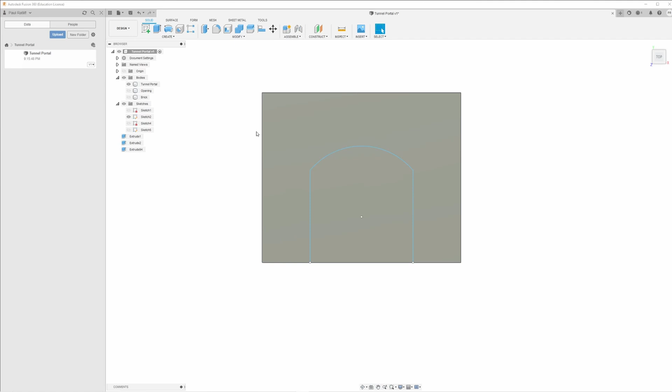First thing we want to do is turn off the brickwork so we don't see it, and turn on our tunnel portal sketch. Now in order to make our framework, we need to come back to where the sketch we need to work with is lit up, the eye is on it so we can see it. We need to right click it and go down to edit sketch and left click.

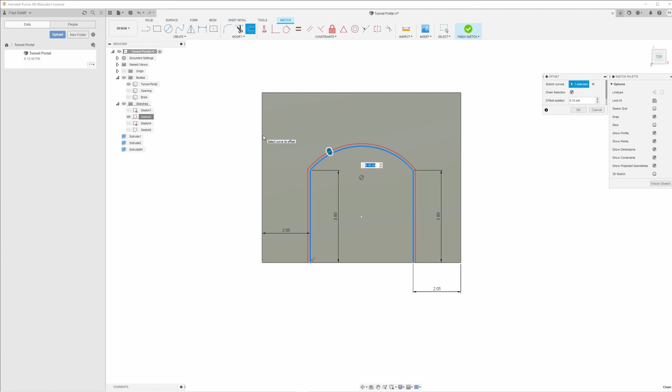Now we can work on these lines, because what we want to do is offset it. So offset, click our tunnel portal opening. I want to make this 5 millimeters, so 0.5, for our tunnel portal opening.

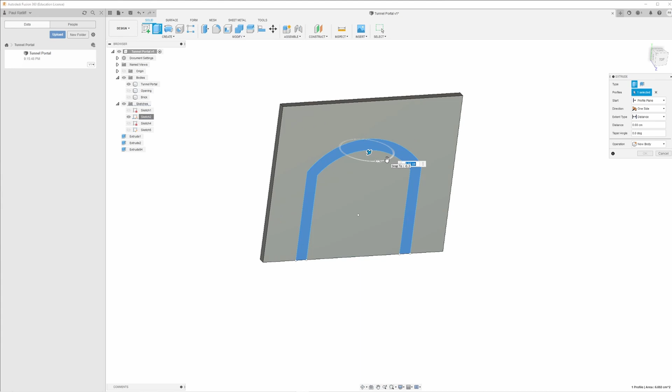Now we want to extrude this opening. So E for extrude, click on just the frame. I want this to be, for right now, 3 millimeters, so 0.3 of a centimeter. And as always, make sure you select a new body.

Now we're going to come up here and name this Portal frame. And we want to hide it.

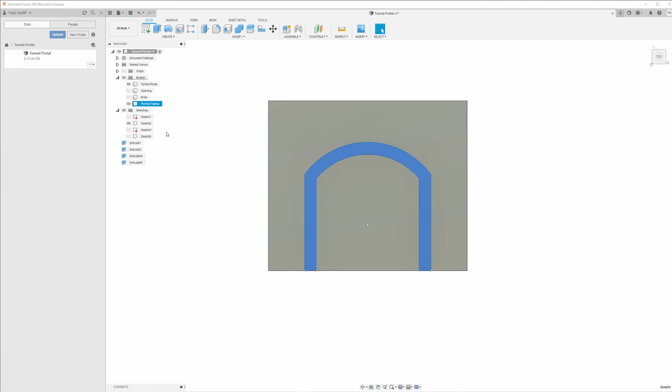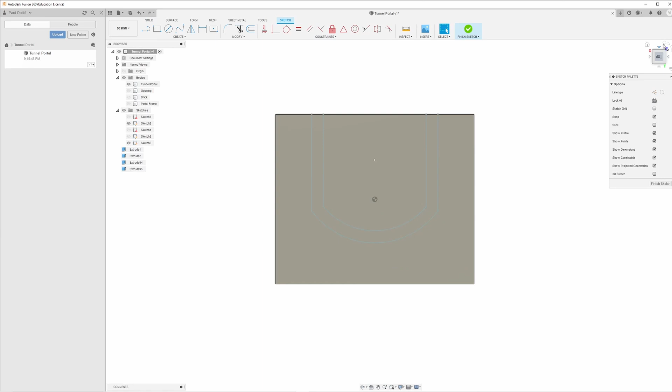Now the next thing I want to do is create a keystone for the center of our arch. So we're going to come back up here to sketch, and you can select, I would not select on the arch itself, but on either one of these. I'm just going to select here, and I don't know why, but it always likes to flip it over on me. Come back up here, and the first thing we need to do is make a center point line that we can work off of.

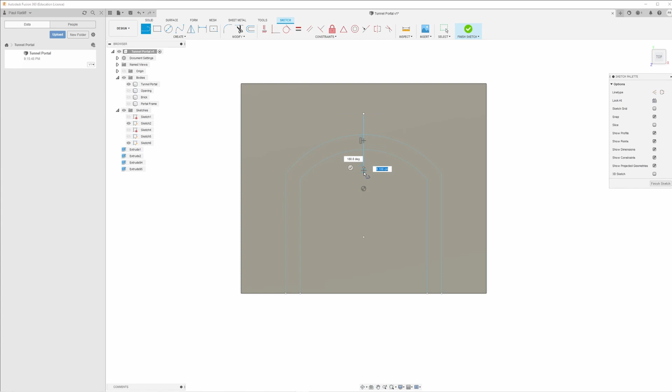So we're going to come up here to line. I like to come back to our origin because we know this is the very center. You can see it kind of drags, a nice straight line up. We'll click above it, back down anywhere in here, doesn't really matter. This is a line we're just going to be working off of. We're not going to actually use it, we'll be deleting it here in a minute.

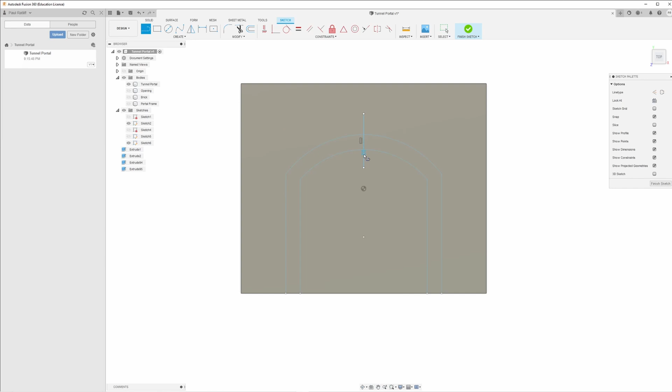Now for my keystone, I want the bottom section to be approximately 6 millimeters wide, so 3 millimeters on either side. We're going to grab a line tool, wherever you might want it, zoom in to see how far down you want it to hang. I'm going to have it hang down just a little bit here. Click on that, go to the right 0.3 of a centimeter. Grab our line tool again, click right here, go to the left 0.3 of a centimeter. That is the bottom portion of our capstone, our center stone, our keystone, I guess is the actual word for it.

Now we need to do the top, and that is going to be 1 centimeter in width total. So let's start up here, again anywhere you want it to be. Go to the right 0.5, so 5 millimeters. You can hit L for line, by the way, you don't have to keep going up here. Go to the left 0.5 centimeters. Now why we did the bottom lines and top lines first is so that when we join it to make our keystone, the angles are going to be exactly the same on both sides. There will be no guesswork this way.

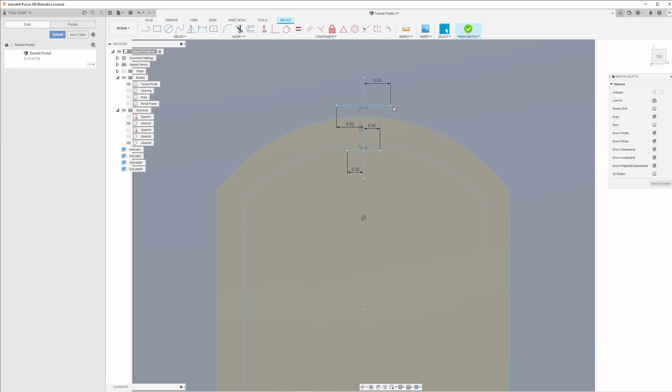So L for line tool again, click that point, drag it down to this point, click it. Now since I did not hit enter, the line tool is still selected, so I can grab this point, come down here to this point, and click.

Okay, now I'm going to hit escape to get rid of that tool. I'm going to click on this line, backspace to delete it.

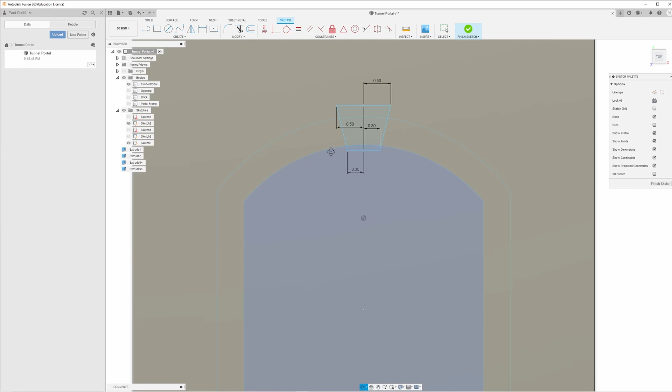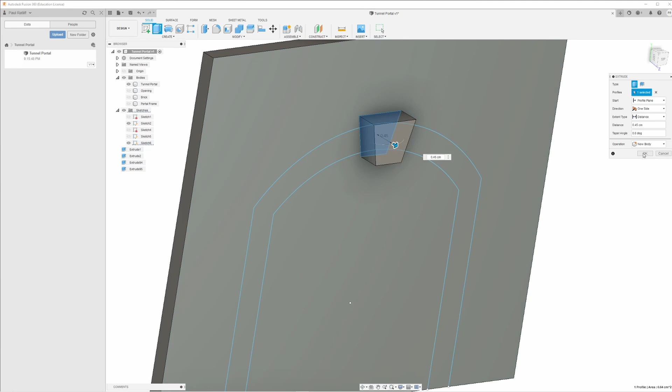Here is our capstone. Now we know that we extruded our frame here 3 millimeters. So I'm going to extrude, E for extrude, our capstone. Let's do it 0.45 of a centimeter. Again, a new body, because we are going to work with this here in a little bit.

These are just getting our basics down, so to speak. Turn off of that. Let's turn the frame back on. And there's what the opening is going to look like once we get the opening. Let me throw the brickwork on here real quick.

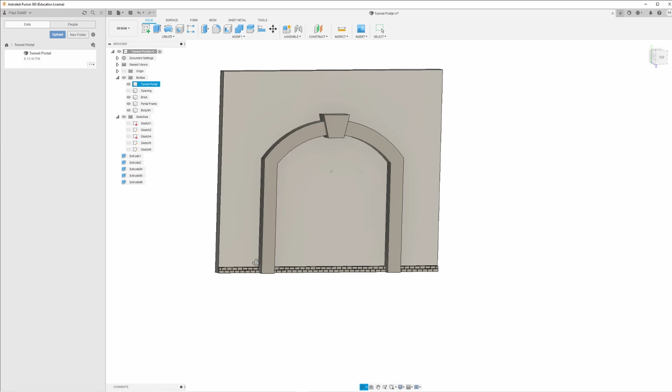And there is the brickwork. As you can see, yes, the brickwork is underneath of this, but it's not going to be printed because it is underneath it. Alright guys. And we can leave all this stuff on if we want to. It's not a big deal.

I am going to actually create the header next. So I'm actually just going to turn all of this off so I don't have to look at it. It doesn't distract me.

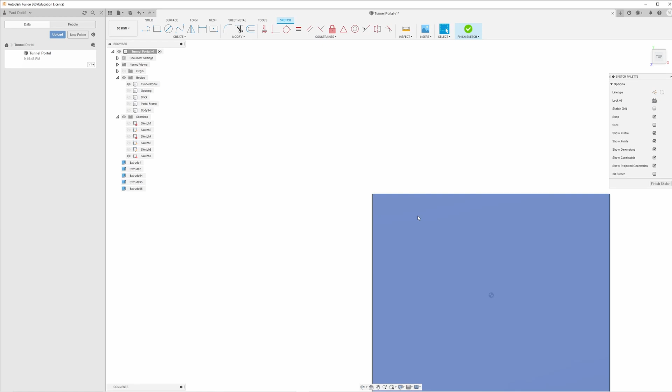Now the header that I want, again, we're going to create a sketch, click on the front of the wall here, grab our 2-point rectangle, and I do believe I called this a 2-point triangle in the last video. I apologize, it is definitely a rectangle.

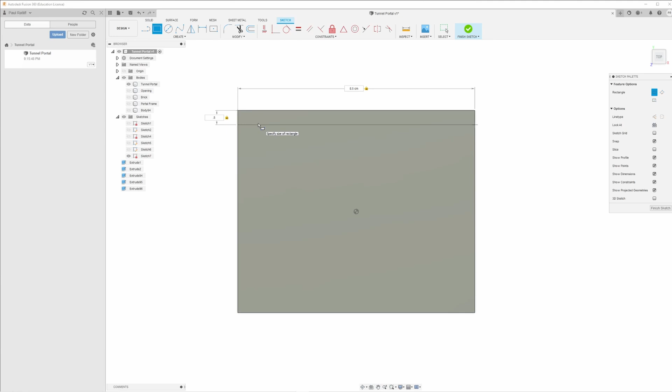We know this is going to be 8.5 centimeters wide, and I want it to be, how deep do I want this to be? Let's make this 5 millimeters down, and let's extrude this out. Let's make this extrusion 6 millimeters, so 0.6.

Again, a new body. There is the top of our header. Now let's make this header a little fancy.

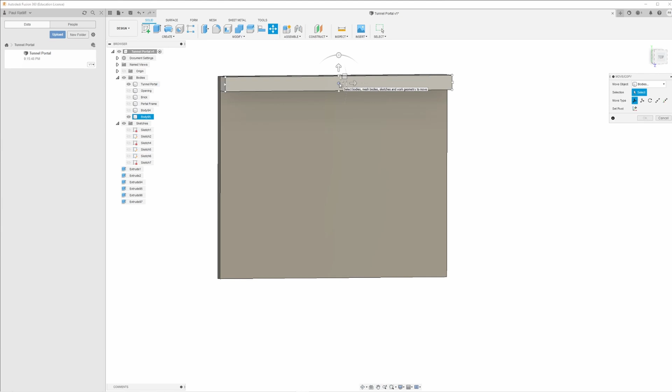What we're going to do, we're going to cheat a little bit here. It's not actually cheating, but we're going to grab this header. We're going to create a copy, and we are going to drag this copy down. I'm going to drag it down a little ways. That way I have access to the inside faces of both of these so we can align them really well. So click OK.

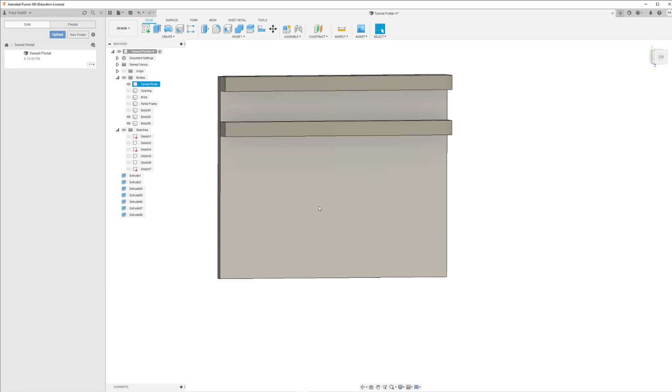Next thing I want to do is I want to align this to this. So we're going to grab our align tool, click on the inside of this object and the inside of that object, and it brings them together.

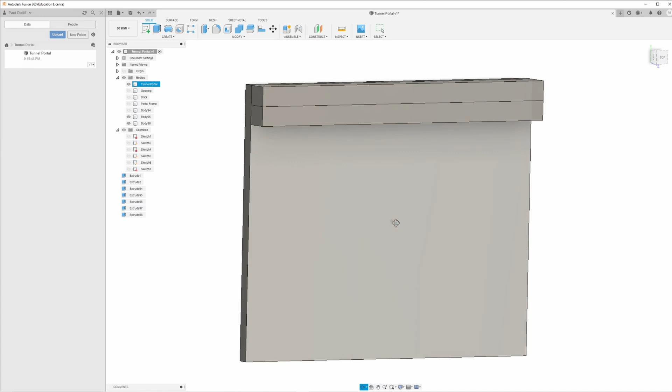Again, I may have mentioned, or I forgot to mention in the last video, I mentioned it in the previous set of videos when we did the shed, but you see me moving things around here. All that is you click and hold down the center scroll button and you use your mouse or trackball to move the object around the screen. And if you want to rotate it, you hold down the center scroll button, the shift key, then you can rotate this in any direction that you want. And as always, if you get lost, come back up here, hit home, and it brings it back to the home base. Alright, enough of that.

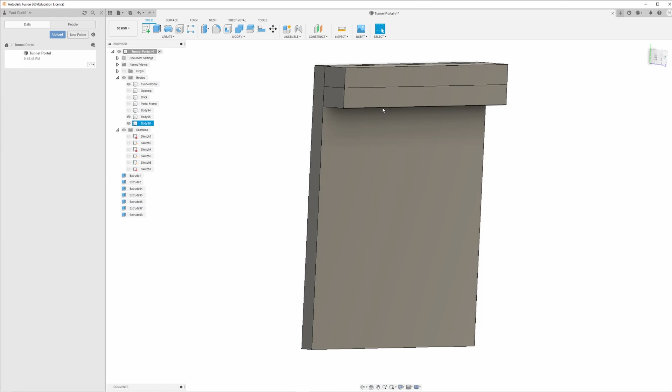This I want to make a little bit shorter than this, so we're just going to extrude it down. So E for extrude, and I only want it to be 3.5 millimeters tall. We have it at 6 millimeters right now, so that is 2.5 millimeters.

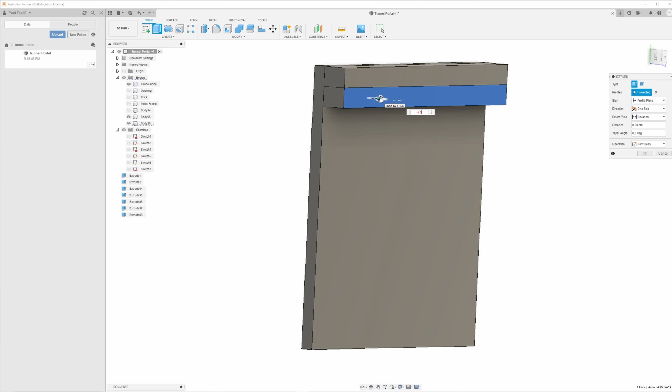So minus 2.5. Whoa, back up. Minus 0.25. That's much better. We're doing a cut.

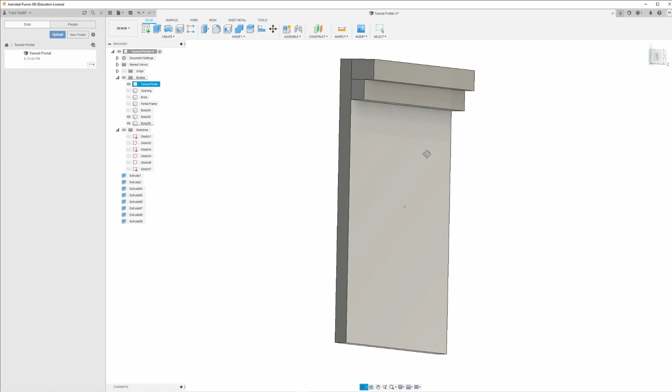Next thing I want to do is we're going to add a little bit of fanciness to this. I'm going to roll this edge. So we come up here to our fillet. But I don't want to do a rolling ball. I want to do a setback. And so click on setback.

Click on this edge here, and I'm going to push it all the way in. Now that's what setback looks like. That's what I like for this.

Now let me go back and cancel this and show you what the rolling ball looks like. Okay, rolling ball is your standard, what pops up every time. And it looks pretty much the same. Boy, I feel like a fool. There are different points on different things I've designed where it does make a difference. Apparently not this time. I don't think so.

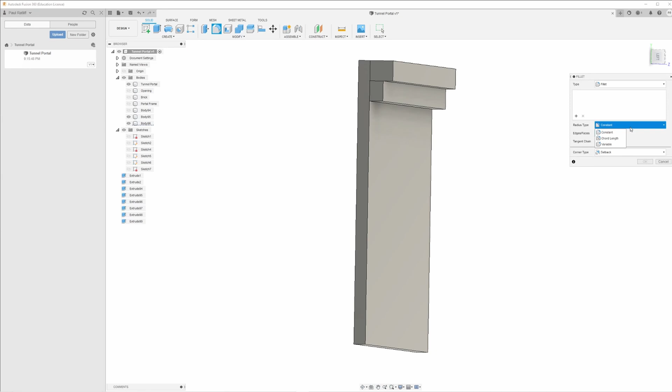Setback. I like setback, it looks slightly different to me. Doesn't it look different to you? We'll go with that.

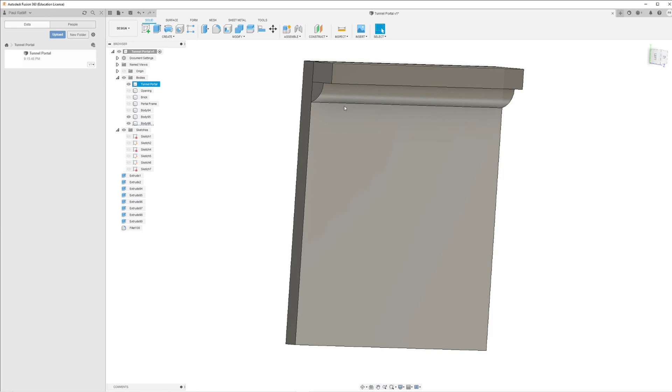Okay, now we're not done just yet. I want to make something a little fancy, I don't know if you call them porticles or what they are, but we're going to make something fancy. We're going to look at it sideways here.

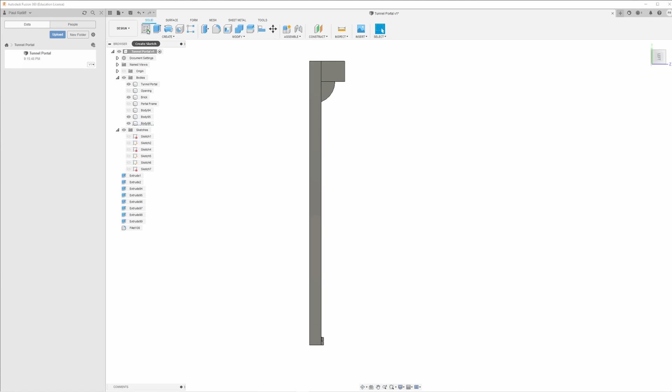Now I'm going to turn my brickwork on just so I can see the depth of it. It's kind of like eyeball what I'm going to do here. We're going to create a new sketch, and I'm just going to create it on this plane.

And what we're going to do here, this is going to be completely and totally up to you what you want to do. I'm just going to use a line tool.

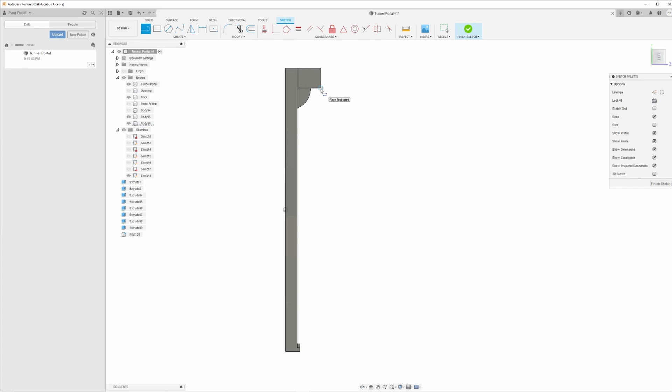I'm going to start on this corner, come out a little ways, click it, come down at an angle, click it, come back out just straight a little bit more, click it, come down at an angle. I didn't want that much of an angle, I clicked too soon.

Let's see here. We're going to come straight down, meet up with this edge, come up here to the corner, and we'll close it.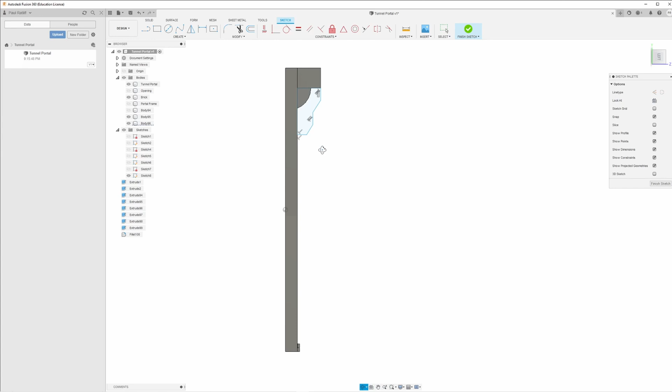And you can see it sits right there in the very center. Now I do want to turn my portal frame on to make sure. Well, see that's too—see, I'm glad I did that, because that's going to interfere with the keystone. That's way too big.

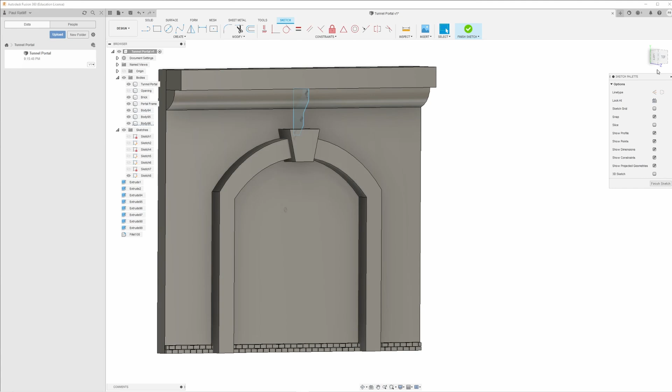I think maybe I'll leave my keystone on as I redesign this. Now it lets me push it in. You see how that worked?

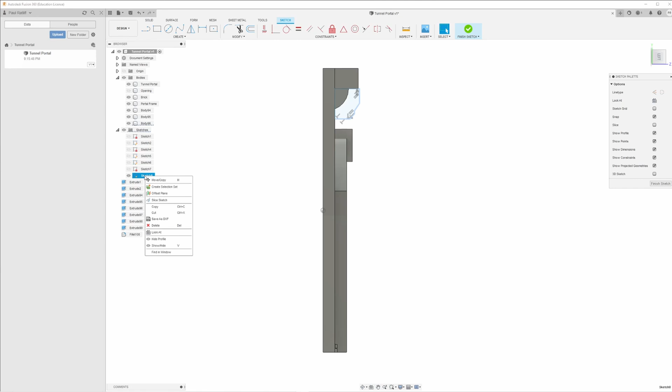Now actually I'm just going to get rid of that, all of it. I'm going to start from scratch. So you can right click there and click delete. So again, let's start from scratch. Sketch—we're going to sketch on this plane.

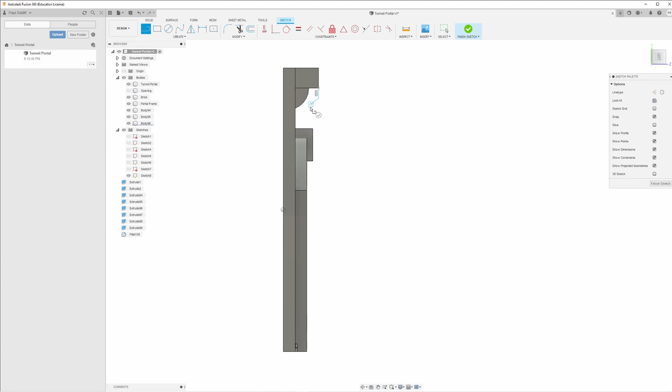We're not going to get quite as crazy this time. Come out a little bit, come down a little bit. What's that going to look like? Well, that might look okay.

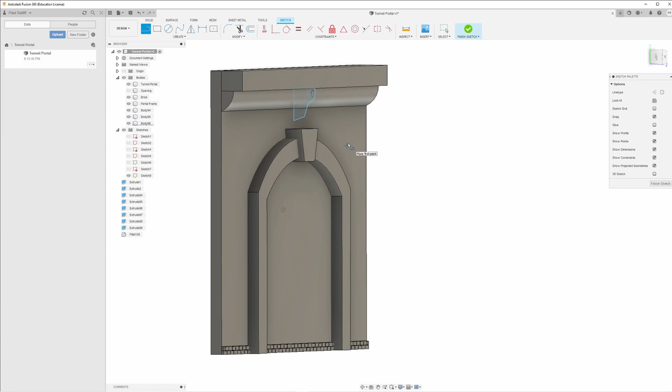Let's extrude it and see. Again, make it a new body. Let's do 2.25 of a centimeter. Click OK.

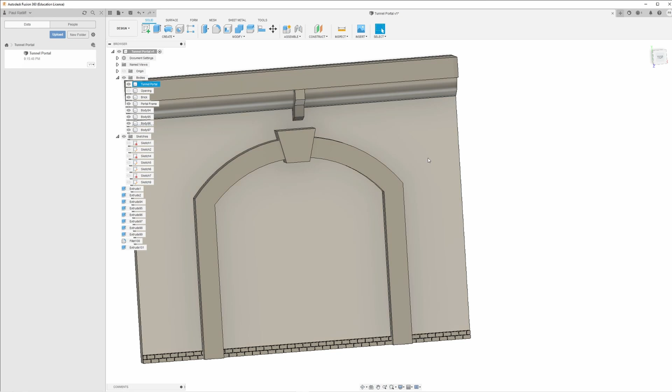Now let's align this. Click your align tool, come up here, click the side of this new object we just created, and let's align it right up here at the side. Click OK. Guess I need to get back to some housekeeping here real quick.

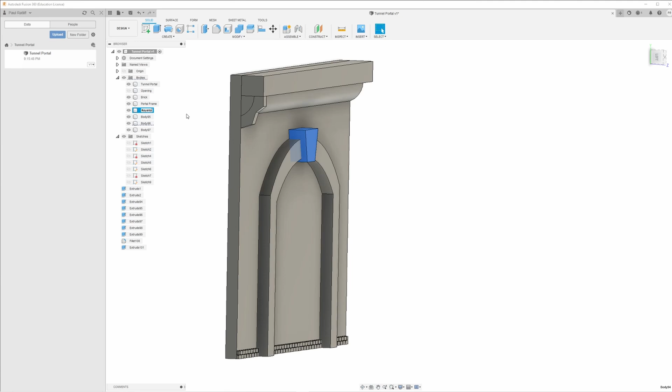Do some naming. Keystone. Header. Alright, all the rest of this is going to be combined to this header when we get done. So I'm just going to leave it at that.

That looks a little thinnish to me. Let's pull this out a little bit—0.05, make it 3 millimeters wide. That looks a little bit better.

Now let's go and do a fillet again. I'll do a setback again here, just give it a little bit, just round these corners off a little bit here. Actually, let's do both corners at the same time.

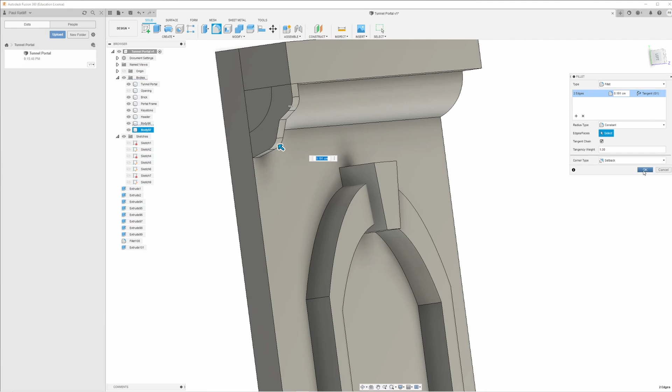Okay, so you can do as many corners as you want, or edges. Let's select that one and then this one. Set them both back just a little bit. Make them rounded, not squared off. Kind of like that.

Now, as I mentioned before I got started designing this, this is not going to look like the first one I showed you, because that one I've already designed. And each time we design something, it's always going to be a little bit different. But that's okay—these are your designs as well.

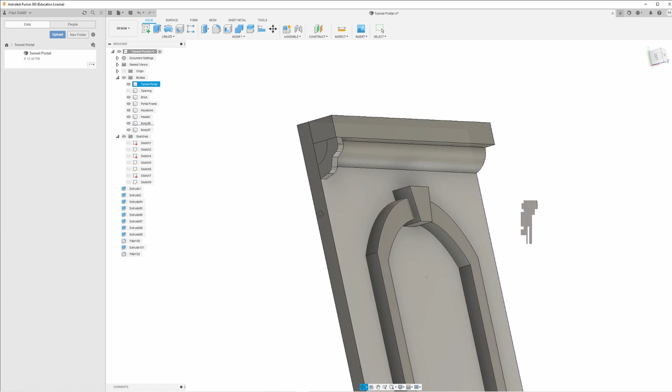So we need to, again, make multiples of these. And how are we going to do that? We are going to create a pattern. Whoops, my finger clicked before I was ready.

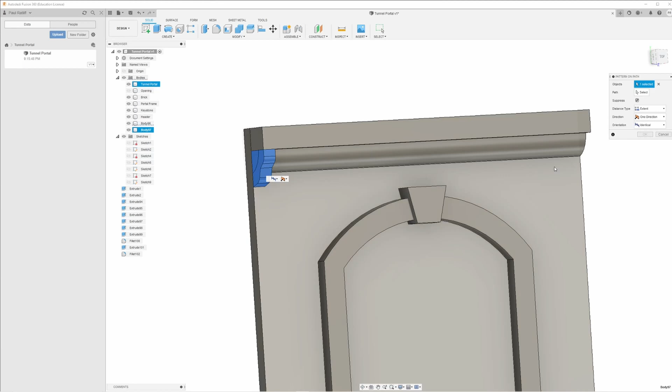Again, back up here to create a pattern—pattern on path. Select our object, which is this is our object. Path direction, our path is going to be this.

And we will just zoom in here a little bit, get eyeball it real close. That's good enough to me.

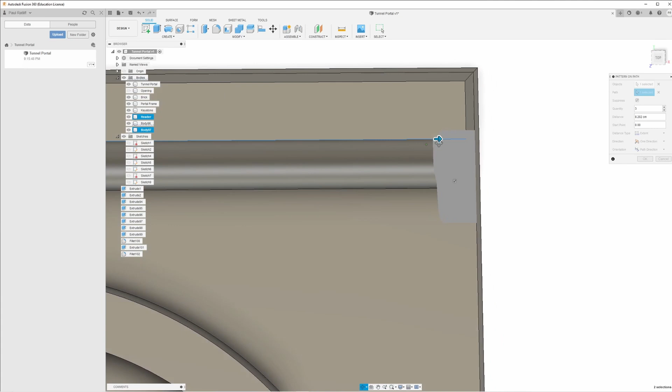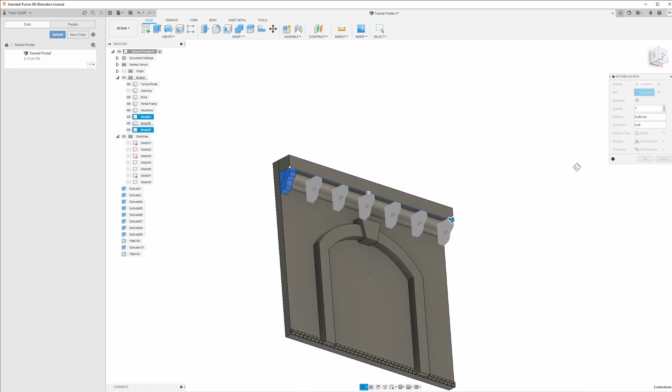If you wanted only 3, you would be done. And in order to always have a center one over your keystone, the quantity is going to have to be an odd number. Let's bump up to 5, see what that looks like. 7, let's do 7. Nah, let's back it back down to 5. That's what I did on the first model. That'll work. Click OK.

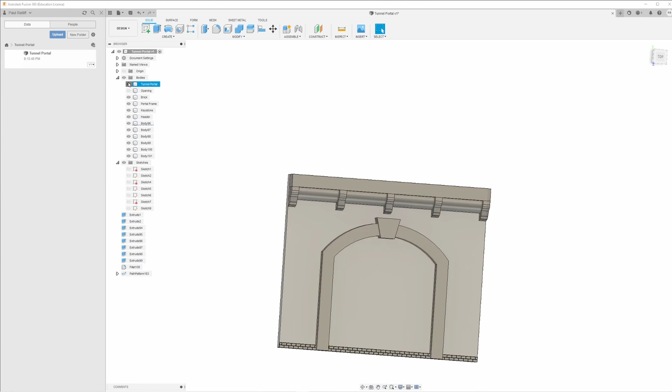I like that. So let us go and turn everything else off except for that. Let's combine these into one. So click on the header first since we named that. Come back here, left click and drag to select everything else. Make sure the operation is join. Click OK, and there is our header.

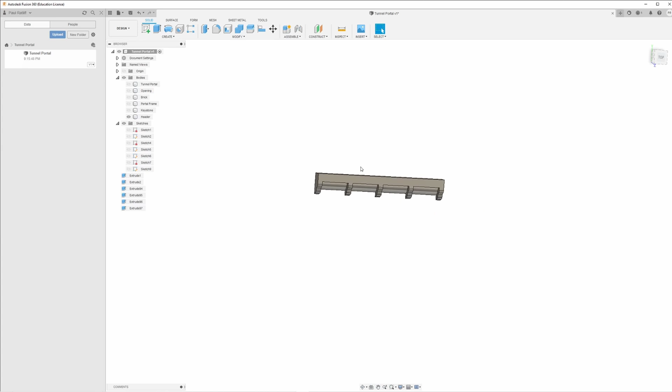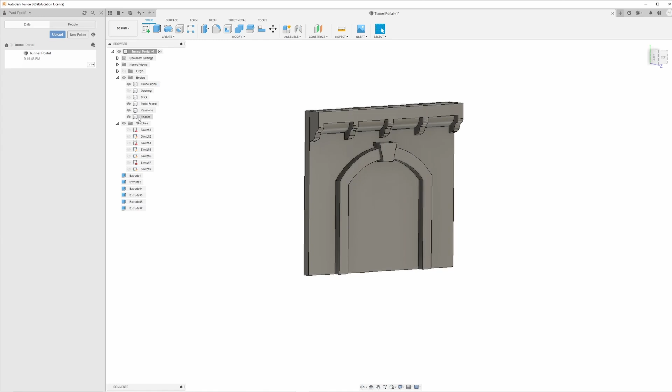This is what we have so far. Now you notice I have not joined any of this to the actual tunnel portal wall itself, and I'm doing that on purpose. Once I show you guys how to do this, you can always come back and turn all this stuff off and create your own. If you want to create something that looks like it's out of an old western gold mine with just a timber framed opening or what have you, you've got your basic start right here.

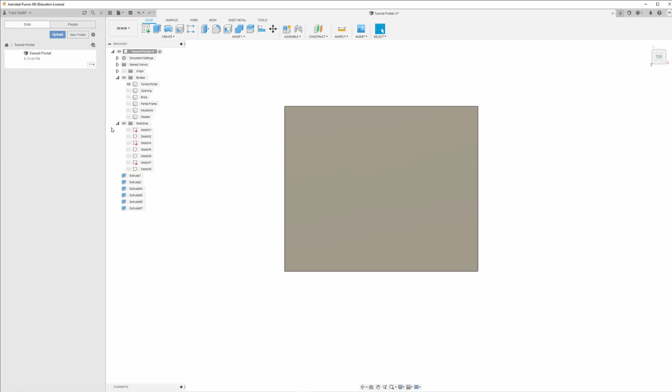But let's get back and let's finish our brickwork now. So we have our brickwork and we need to bring this all the way up to the top. And how are we going to do that? You guessed it, we are going to do a pattern again. So pattern on path.

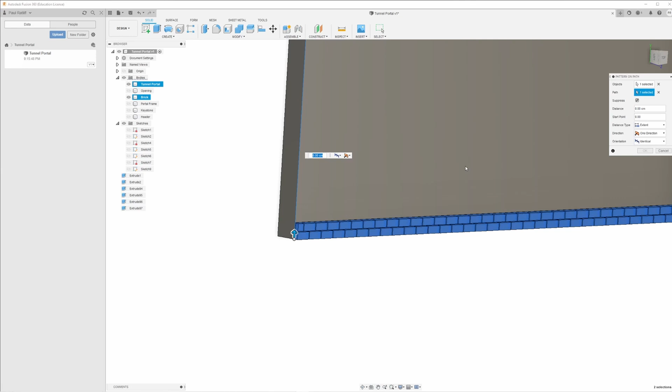Make sure we select all of our brick. Come over here, select path, using that as our path. Again, I like to use path direction. Let's just drag this all the way to the top here. Once again, we're going to zoom in.

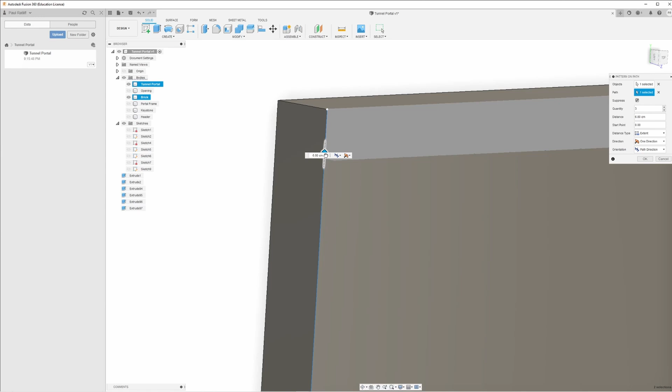Now, granted, our header is going to cover this up. Actually, I'll probably delete a few of these on the top, but we still have to have this up here so we can get the right distance for all of them. And we do not want... come on, where I want you. Okay, you see where I made that mortar line? I want to go above that a little bit. I actually want to line the brick up at the top, not the mortar line.

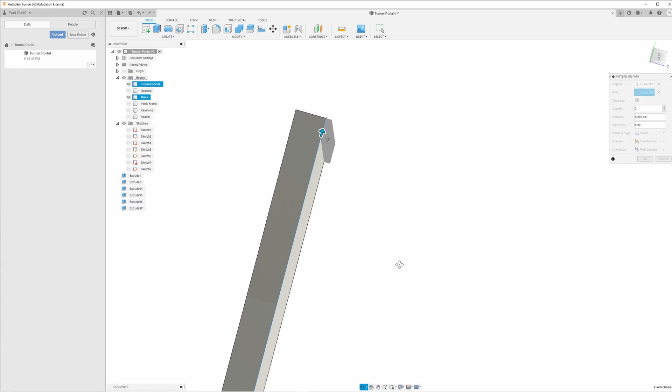Again, we don't need just to click the quantity. I'm going to start with an arbitrary number. Let's do 36, see what that looks like. And it's way too much.

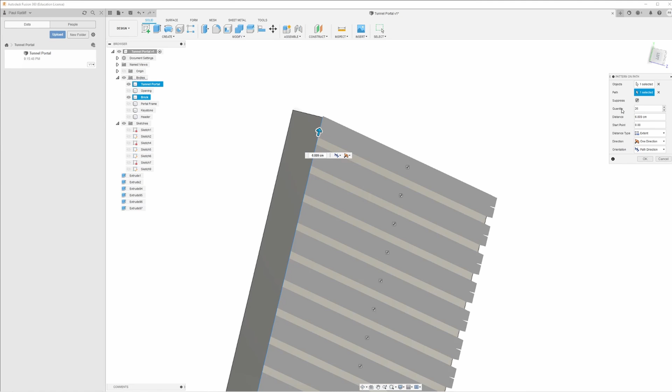So let's do 26. This is quite a bit of computational algorithm for your computer, so it may take a moment to catch up, like mine did there. 26 is getting us there, it's getting us close. 27, 28. Yep, it's thinking.

From what I can tell, doing brickwork is one of the toughest parts for modeling for your computer as far as lag time. I do have a gaming computer, it's a pretty decent one, and I still, as you can tell, it's lagging. Let's just go ahead and... it's still lagging.

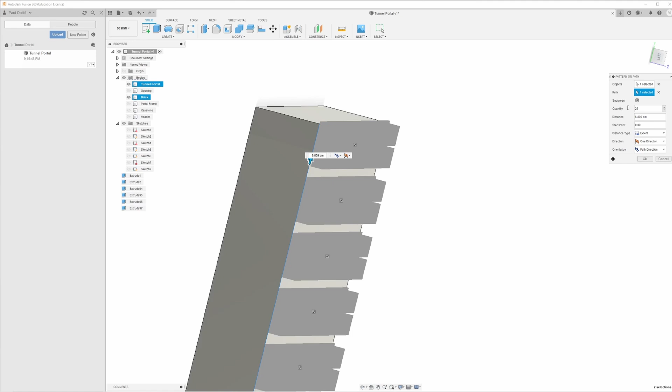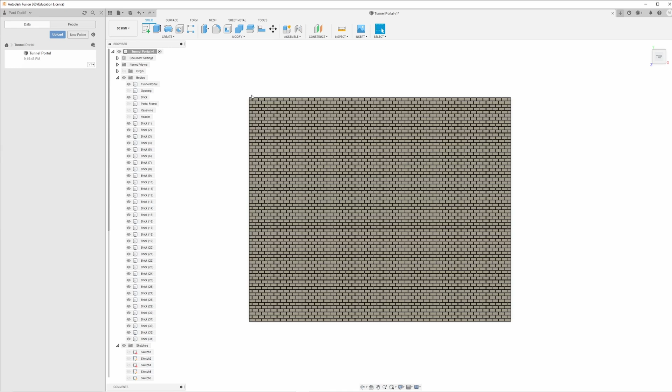Alright guys, I had to pause the recording there for just a moment. My computer was taking forever to do the computations to create all of this brick texture. To help you guys out, if you followed along with me to the point to where you extended the path from the bottom of the wall to the top, and you had just the 3 rows of brick texture, and you've got it to where your mortar joint is overhanging the top of the actual wall like that, like I do here.

For your quantity, just type in 35 and that'll give you this. And it may take, depending on your computer, you know, even a good fast computer like mine, it took a couple of minutes for it to render it all. Okay, so our brick texture for the most part is done.

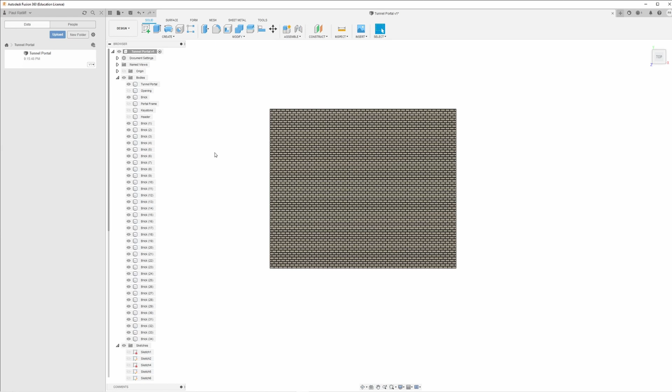What I like to do next is I am going to turn my header back on, see where that sits. And this is something you really don't have to do, but I like to do it. It's not going to show up when you print, but I like to make sure. So I'm going to click on that one, hold down your control key, and just start clicking on a few of them.

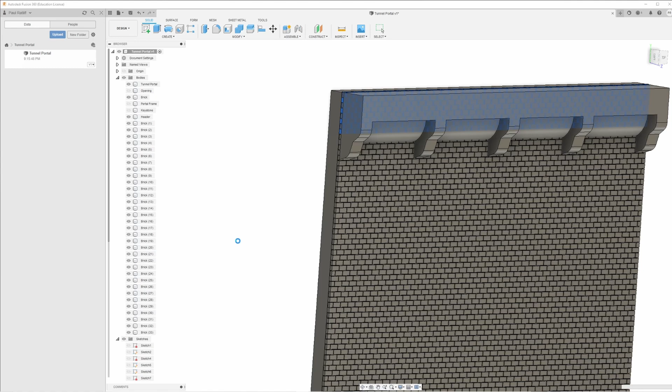Okay, I don't want that one because that small part of the brick shows. We'll right click and delete. Again, this may take a few moments for these to delete. Alright guys, I'm going to suggest do not delete those bricks.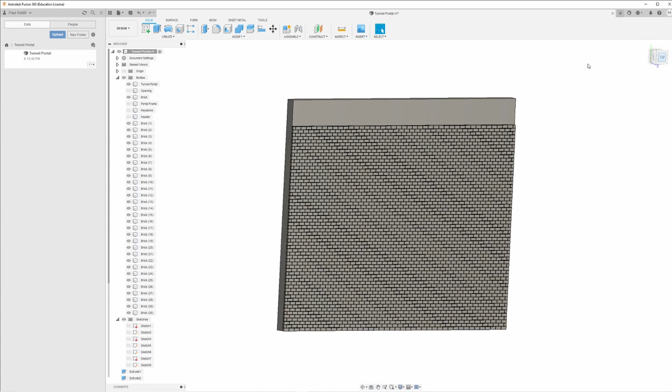It's really not necessary, and that took about 5 minutes. That was ridiculous. Okay, next thing I'm going to do is turn off this header, and combine these bricks with this back wall. Hopefully that will help free up some computer memory, power, video card, whatever it is using. This again is probably going to take a few minutes.

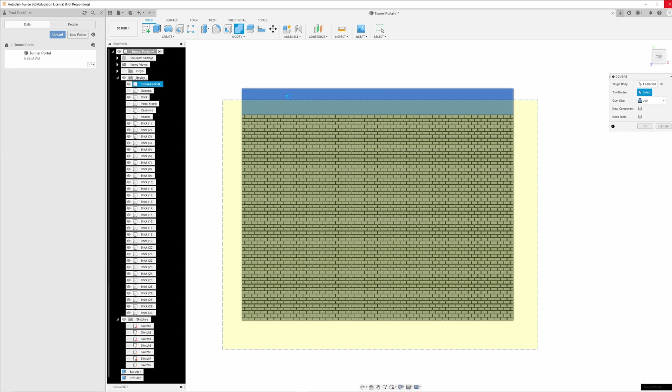So what I did, I clicked on combine, clicked on the tunnel portal wall, and then right click and dragged over all of the bricks. Make sure the operation is join, click OK. Let's see how fast this works.

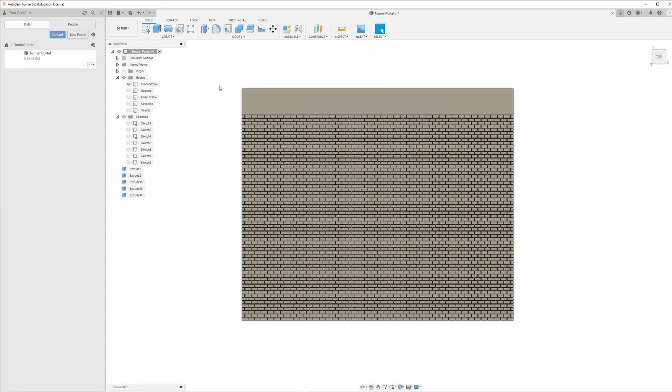Again, this is a problem with doing bricks, it takes a lot of computer power to do them. Hopefully, by joining these with this wall, now it's just one unit, so maybe that'll be a little bit better as far as the speed goes.

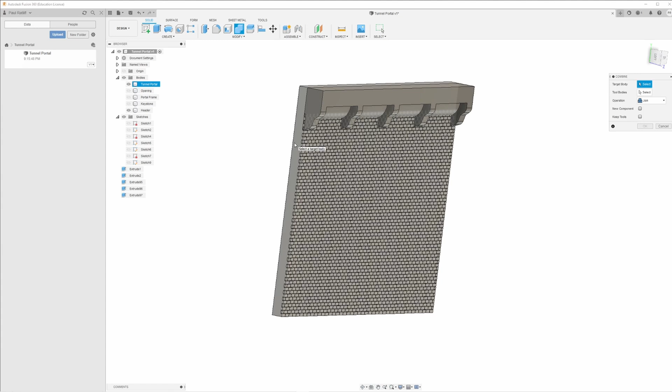But turn the header back on because I am actually going to join that with this as well, combine it. Alright, this is one unit.

Now we're going to finish off getting through just the actual basic tunnel portal here. In my next video, we're going to make it a little fancy. So let's go ahead, put the frame back on, put the keystone on so we can see them, and let's do our opening.

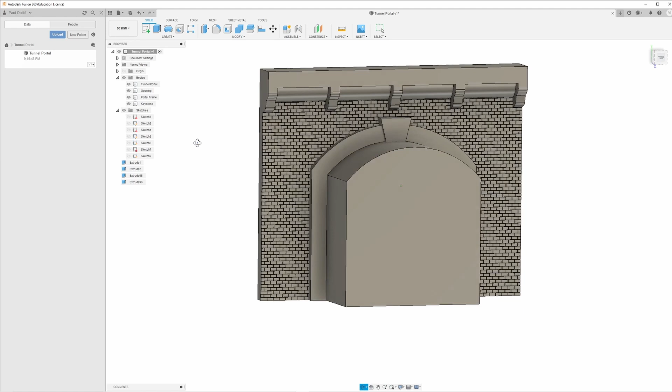Now we're going to want to move this opening here so we can cut a hole through everything. So grab your move copy tool, grab your opening, and just slide it all the way through.

Click OK. Now we're going to do combine. We want to combine it with the brick and the actual tunnel wall, but since we made it all one unit now, we just click on that. That is our target body. This is our tool body that I just clicked.

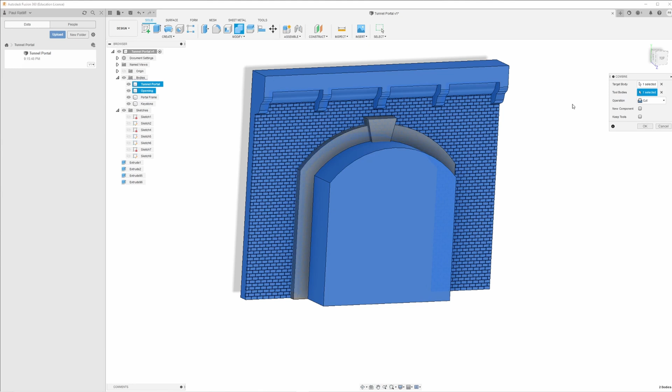We want to cut, and I am going to keep the tool just in case I need it, just in case I mess something up. Click OK.

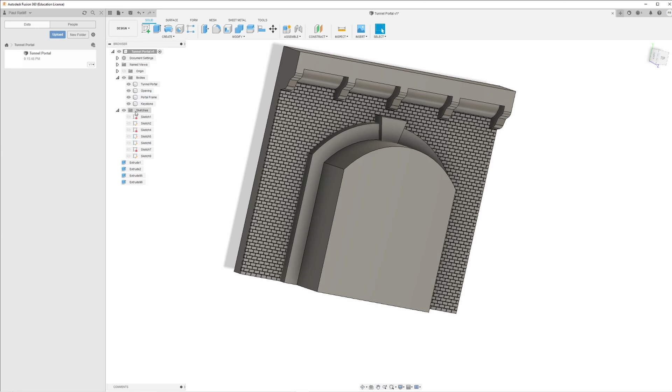Let us turn off our opening. And there is our basic tunnel portal.

Now you guys could stop right here. You do not actually have to combine any of this. When you export it, it will export as one unit to be printed.

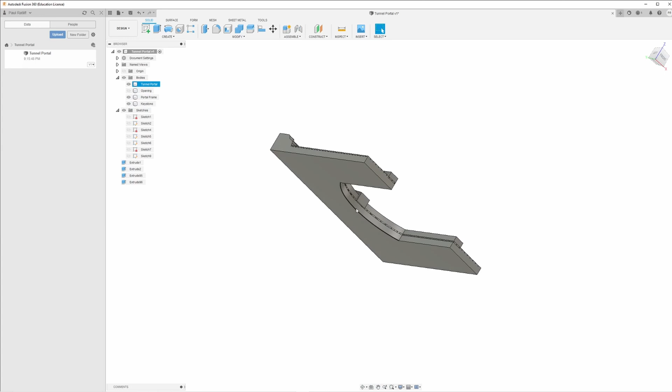I am going to finish something up here. I'm going to bring my keystone all the way through the opening here. So I am just going to press pull, grab the back of the keystone again, just start pulling it, click on the back of the wall. Click OK.

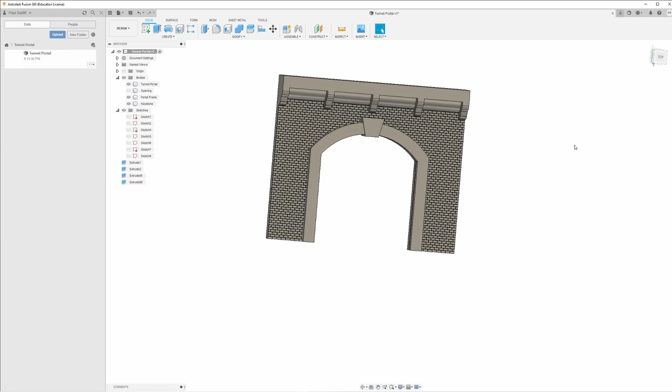There we go. Something I have not done at all through this build is I have not saved it. That's a big no-no. So let's just hit Control S.

Alright guys, this is where we're going to end this video. There was a lot of pausing just because of doing this brickwork, and no matter what computer you use, it's going to take a minute for the computer to compute all of these bricks to make it work.

If you're happy with this right now, you could just export it as an STL, and you can print it out to your heart's content.

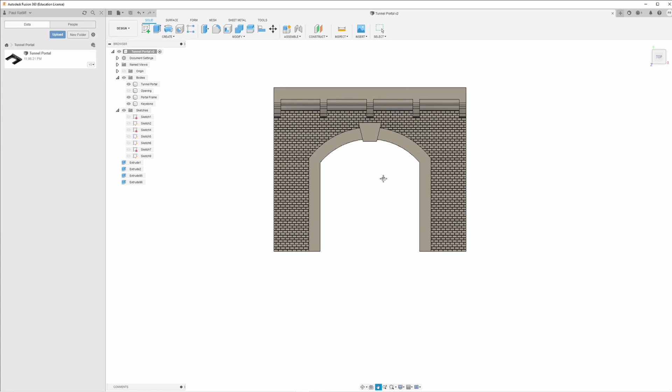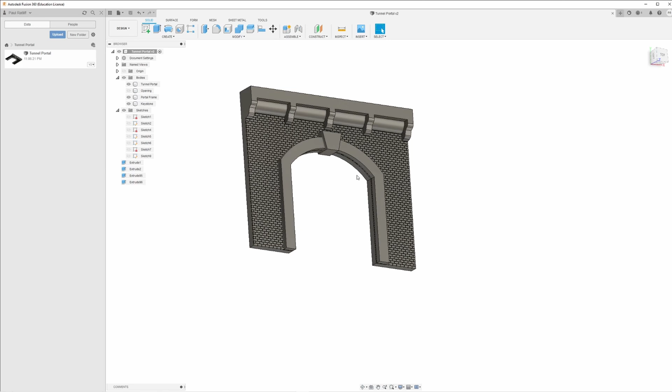When we come back, there's going to be 2 more videos. I'm going to make some fancy stanchions, if you will, on either side like you saw in my finished tunnel portal that I showed at the very first video. And then the last video is something I have not shown you, but I'm going to make a very short tunnel liner with brick. Something may not be necessary for N scale.

You may not be able to see into the tunnel because it's so small, but as always, what I'm doing here can be used for any scale. You just have to convert all the measurements to your particular scale. So until then, we'll see you next time.